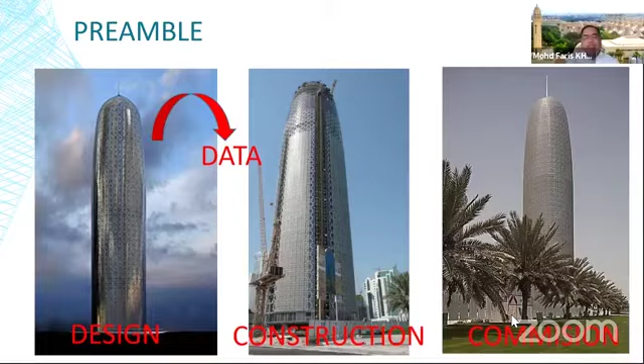What we see and what we should be seeing is actually data—data from the design phase, moving to the construction phase, moving to the commissioning phase, and it will go back to operations and maintenance, which is very relevant to the 6th or 7th dimension of BIM, referring to facilities management. This is the essence of the very important layer that everyone in this AEC profession must understand.

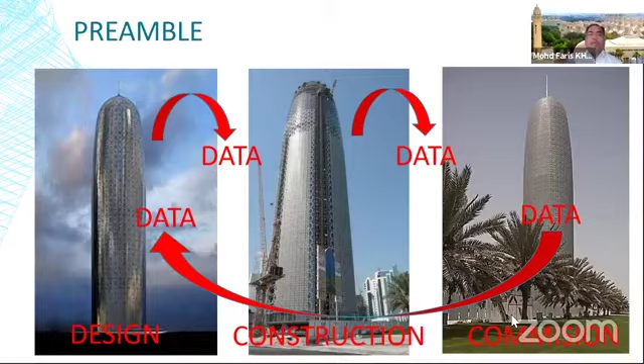All right, so let's move to the next one. Another important thing to understand is data is the new oil. But when I say the new oil...

It is a commodity, right? Of course, data comes in abundance, but not all data is crucial—or you can monetize it, turn it into money, enterprising it, and later on of course we heard things like data analytics.

Oh, my internet connection is unstable. Yeah, we are okay, I hope I'm still good. Okay, I hope I'm good and everyone can hear me well.

All right, so with this understanding, we know why, if you go by the Fortune 500 list, easily the top 10 companies in the world are no longer oil and gas companies, but data-driven enterprises—companies like Google, Microsoft, Facebook, Amazon, Uber. Although the very essence of Uber's business is about moving people around, it is very much about data.

And as we are aware, data has always been there. But in today's world, the way we organize data is different.

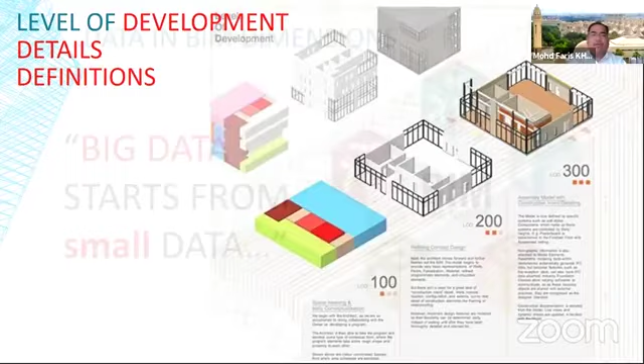For example, if you are referring to coming up with simulations of the construction process, then the 4D time associated with cost are also crucial.

Some of the things we have done, as an educator, I deal more with students at undergraduate level. We make sure that by the time they graduate, regardless of their major—architect, quantity surveyor, or project manager—they understand the idea of doing 5D BIM. That is very crucial.

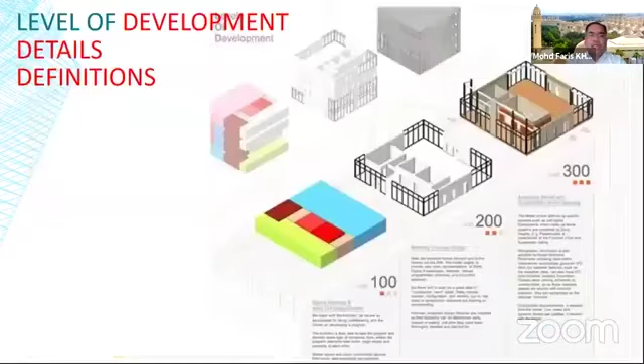Because from the project management point of view, time, cost, and quality is always important. And of course, another crucial thing is to try to bring everything onto the same page—we are referring to the common data environment.

I think many of us are aware of this, but as you can see, the phases I'm referring to are the project information management, especially in the design and construction phase, and then the asset management systems, which is very relevant to facilities managers. The whole thing is essential to ensure the data we collate will support whatever project objective we want to achieve.

Beyond common data environment, what is more crucial nowadays, which I found quite a lot of experts around the world talking about, is that not only is common data environment important, it is also essential to ensure the CDE is connected to all the stakeholders of the project.

This is another layer which is crucial, because if you have data in a common environment for the project, but you don't make sure the data is connected to the relevant stakeholders in the project, then I would suggest it is not useful to do so.

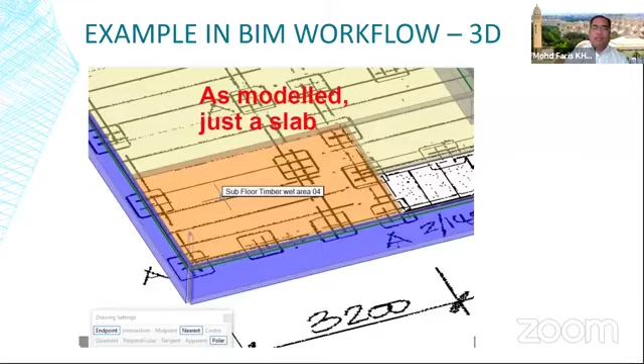For example, you just model a slab, so maybe the typical dimensions are there, but using a more parametric authoring tool - of course, we understand all computer tools, authoring tools associated with the BIM workflow have these parametric characteristics or features. So this is what you can add to the level of detail of the slabs we are talking about. So more information there, and this information, at whatever dimension you are dealing with, will be very, very useful.

Depending, for example, if you need to know from a maintenance point of view, when should you change this? Of course, you don't change the floor slab, but assuming this is the timber strip in one of your bedrooms on the second floor, then this metadata will provide you that level of information required at that point in time.

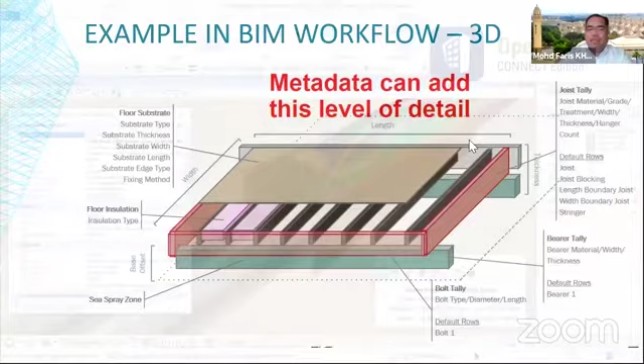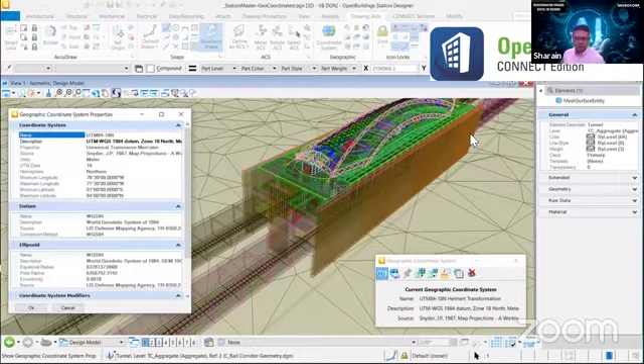Okay, let's move quick. So another interesting thing that has been developed - I try as much as possible not to promote any brand here. So beyond the typical way of using BIM, we understand the collaboration among the main actors and stakeholders, but now people are also talking about OpenBuildings, meaning people can go beyond looking at the model, they can dive in and look into more details. This can happen among all project stakeholders - the architects, the civil, structural, mechanical, electrical engineers, and the project managers. So what I'm trying to suggest here...

But the point is I think most of it is actually what we call a national initiative, and because of this emergence of abundance of data and information, there is a serious need to start taking care of how this data can be governed - we are referring to standardization. There is an initiative in terms of achieving international BIM object standards covering all these things. In essence, it is all about curation of assets. Curation of assets. Let me go quickly through some of the initiatives that have matured.

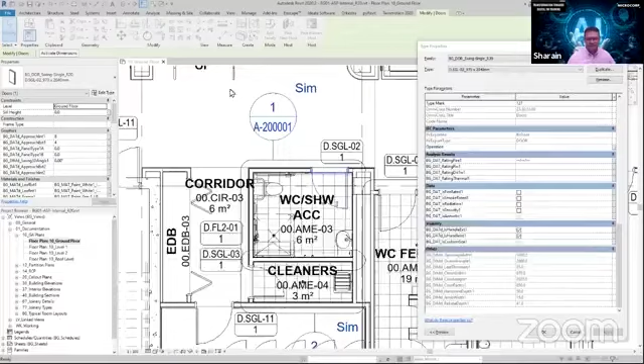Okay, whoops, I'm in Revit. Is my screen coming through? Yep, excellent. So I guess I wanted to focus on the topic tonight, but also from a perspective that I'm comfortable talking about given my own experience.

I'm going to be focusing on catching the I in BIM, as we spoke about. Just a little bit about me for people that haven't met me or seen me before. I'm from Australia, in Sydney. I have an architectural background. I've worked for about 10 years in this really fun and interesting industry that is AEC.

I've typically delivered using Revit or managed teams delivering projects using Revit, from concept through to the end of the construction phase. So typically, whilst I haven't prepared facilities management platforms, I have prepared models with the intent of being handed over to a facilities management team for the client.

At the start of this year, I actually became a BIM consultant. So I currently work in a business called BIM Guru, but other people might recognize me from my YouTube channel, the Aussie BIM Guru. I'd like to thank Microcorp for having me on board. It's always great to meet people around the world and hear about how they're using BIM and what they think about BIM.

It was a really interesting presentation before. I really enjoyed even just breaking down the words and understanding the concepts, but I'll expand upon that a bit as well. So I'm not going to market my business.

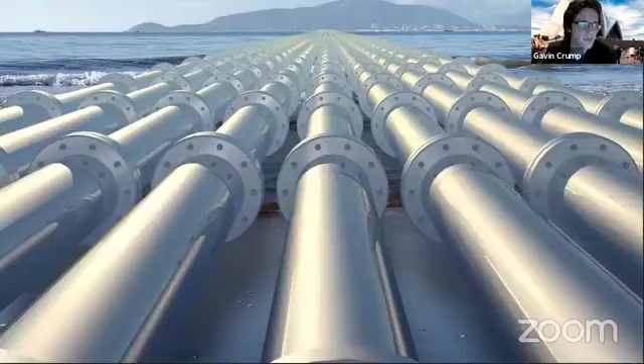When you deal with information, it's always really important to know where you stand in the industry on how developed your information maturity is. That's a really critical point that I always encourage my clients to think about. I like to look at information a little bit like a pipeline. Essentially, we're starting at the beginning of the pipeline and sending data through the project to the end, and I guess the pipeline never technically finishes because eventually it goes and supports a built asset.

But essentially, if there's one thing wrong in the pipeline, or there's something missing, or someone hasn't installed the right part, we're going to lose data along the way. We're going to lose the oil. Data is the new oil.

I guess it sort of seems to tie into this visual metaphor as well, which is quite funny.

But I guess why is information so important? Most of us realize that BIM is essentially fully dependent upon information. Without information, there's no BIM, we're just dealing with 3D models or 2D drawings at that point. So it's really important that our model is representative of its information correctly.

And I guess the information is really critical because BIM is all about process and communication. And in a digital age today, pretty much all of that also relies on information as well.

So I guess one really big issue that I see throughout the design, construction and facilities management process is that data changes hands and changes formats a lot. And this introduces a lot of risk if it's not managed and articulated properly in some sort of control strategy like a BIM management plan.

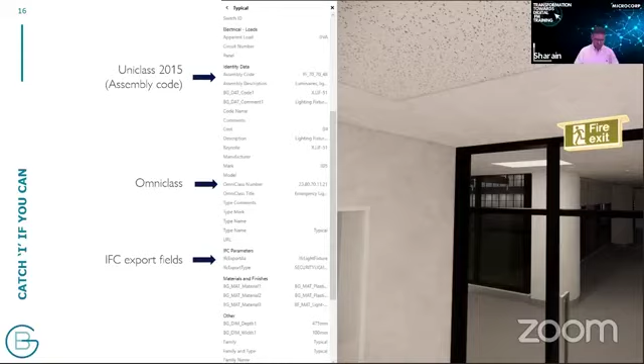This ties back to my point about templating. If you can get some of this base information into your BIM models earlier, you don't even really have to think about it. Once it's there and set to some sort of industry standard, you're already giving your client a much more robust deliverable that they can find things to work with. Even the cost planner would really appreciate having fields like Uniclass or Omniclass in the model, because that enables them to interface with their cost planning software if they're using it.

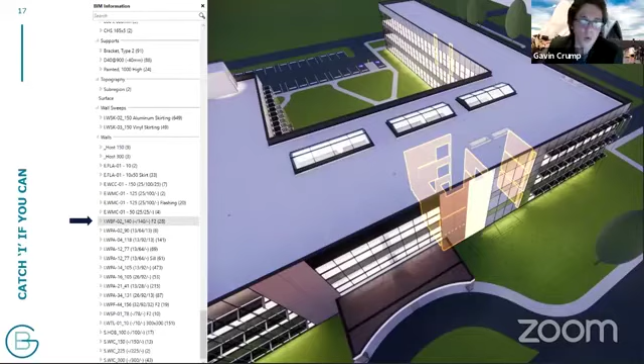As well as this, I find data is really good just for internal review purposes. This is a model I'm actually developing for training in my company, but I've been really careful with how clean I've kept the data in the model. You can see here I'm able to use the wall types - it's really easy for me to audit because I can just select them by entire type at once. For example, I'm looking at all the fire rated blockwork in this model, and I found a couple of walls that were incorrect in this case. So if you can get data set up really well internally, that can be a real benefit as well.

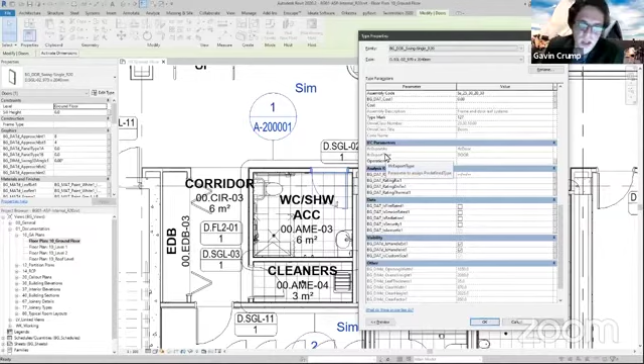I also had an example I was actually working on before this webinar - this is the same model. You can see the amount of custom data and metadata I introduced to my content is quite heavy, but I can do a lot of things with this data. Once I've got this family set up the first time around, I just keep using it on project after project. As a result, you really only have to do the hard work once if you put it in at the start. So I find that's really important.

As well as this, I always try to emphasize that we should be focusing on modeling things well, not just drawing things well. The model shouldn't be a means to get some drawings. It should really be something more about getting a meaningful asset that the client can view and utilize.

And inevitably, I think one day this is going to be the focus of BIM. We're not going to be as focused on having to legally deliver a set of drawings. Eventually, I think they will realize that a robust BIM model can be just as effective for building a building. The challenge is going to be giving the industry confidence that you can legally rely on a model for tolerance, accuracy, QA. There's a lot of issues that come with it.

But I think that in the meantime, there's no excuse to be doing low quality modeling. Ideally, you should set your fee as an architect or an engineer to support the highest quality model that you can give to your client to meet their needs, in my opinion. So I do always emphasize that modeling it right is going to give you a better outcome in most aspects, especially in terms of information and data.

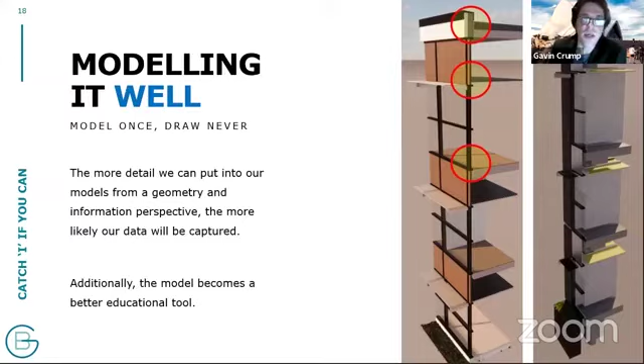So I guess my final thoughts from what I've spoken about is that planning early, I think, is the key to actually improving the quality of information and data throughout the project lifecycle, all the way up until the facilities management stage. So if you can develop systems and templates that are meeting industry standards, and if you're not aware of industry standards, take some time to research them, such as IFC and COBie.

Then you'll find that you will actually probably make your clients and a lot of the project stakeholders a lot more happy naturally, such as the cost planners. But they'll love you if you can get a classification system in your model without being asked to do it. As well as this, I think communicating amongst the team as early as possible and as effectively and as openly as possible is the key to making this all work.

I think if you can introduce the client to the value of their data as early as possible, that will open up a lot of opportunities for you and them and the project as a result as well. So I guess involving everyone is the key.

So I hope that you've enjoyed just my thoughts on the value of information, and I look forward to exchanging thoughts with the panel after as well. And thank you for having me on board.

Okay, I like that, because most of us always forget about that. Yeah, sometimes we did a lot of activities with the computers. Yeah, well, there's a lot of things going on behind the scenes that really bring it all together. And I guess if we can focus more on giving the model more quality early, then it gives everyone a better time at the end of the process too, ideally. Yeah, and then the good part is the thought about the communication. This is always something we have, but we don't have.